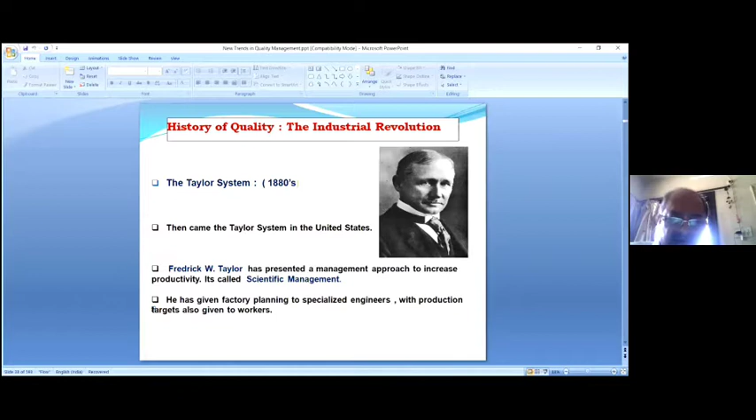Cost of poor quality, or cost of quality concept, was introduced. The factory system was developed. Taylor introduced the principle of scientific management around 1880.

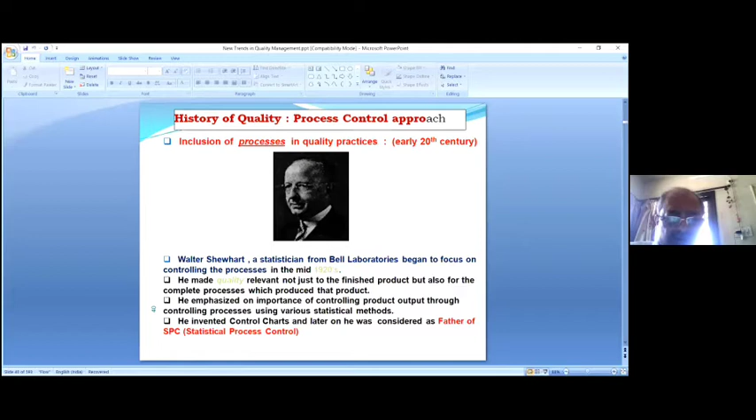Then Shewhart introduced SPC. He is called the father of statistical process control. This is history of quality around World War or something.

Then Deming says that learning is not compulsory, neither is survival. Nobody says that you should learn, it is not compulsory. But if we will not learn, it is difficult for us to survive. That is the philosophy what he preached.

Then Japan was considered the hallmark of quality because they started adopting Six Sigma and SPC in a more effective manner. Ishikawa diagram, we know all these things, the concept of internal customer, fishbone diagram. Morita was the Sony company.

The first World Quality Day was celebrated on November 9, 1989. And these are all theory. We can see various comparisons: inspection, what it involved, SQC, TQM.

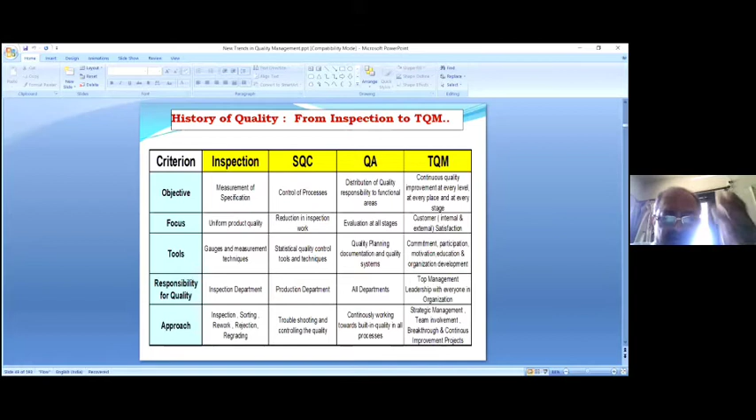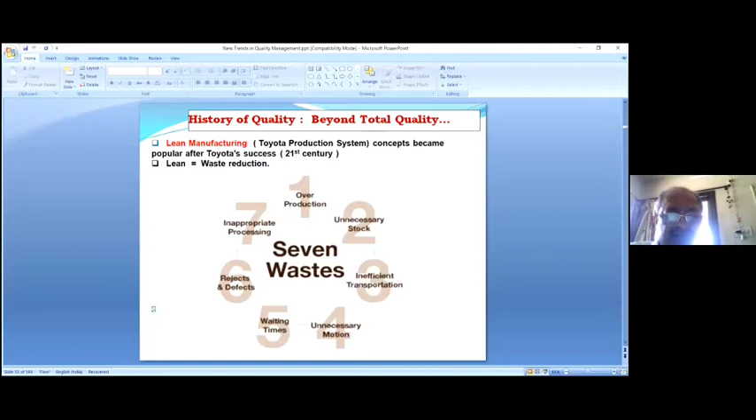Lean manufacturing concept, seven wastes, were introduced and applied by the Taiichi Ohno think tank of Toyota Production System. Shigeo Shingo: SMED, Poka-Yoke, just-in-time, source inspection.

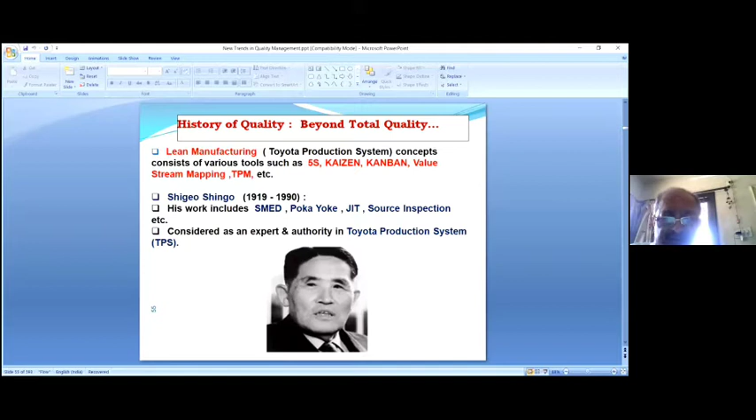Steve Jobs has given a very good definition of quality from today and near future perspective. He died in 2011. That's what I may be wrong, because I do not have time to read all this history, but it is mentioned over here. Somebody from us may be knowing much better about him, but what is mentioned over here.

He said we are supposed to continue to do innovation, pleasantly surprise our customers and competition, and increase the speed of our business process. So indirectly, he was saying about Lean also and Six Sigma.

If we want to increase the speed of our business, we are supposed to identify non-value-added activities, that means the waste of all these things, so that we can deliver the product in minimum time from raw material to the delivery. That indirectly he has said.

Henry Ford: quality means doing it right when no one is looking. This is very simple, this is the definition of quality, from this you can say.

The dictionary. This Japanese quality guru has also given some definition. Quality has to incorporate conformance to specification, fitness for use. You are supposed to delight the customer. What does quality mean? Internal and external customer satisfaction.

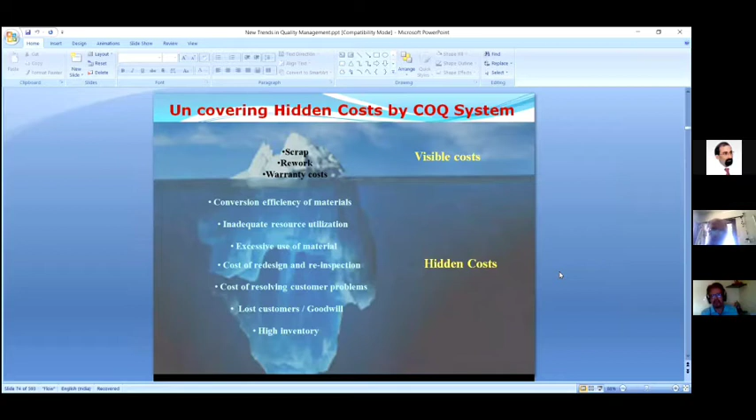For example, lower efficiency of a boiler, say 68%, is a visible waste. But the heat loss which can be and should be recovered to supplement the cost of fuel is a hidden waste. So the industrial engineering department has to continuously work on identifying hidden things. In a machine shop you see scrap lying, people doing reworking, reprocessing, readjustment, but industry has to find out why this is occurring and the reasons for elimination or reduction of all these things.

So the thing which you cannot see is hidden. Loss of customer goodwill is a hidden thing. With this diagram, we can see that road accidents are a visible waste. On Indian roads, every 3.5 minutes an individual loses his or her life.

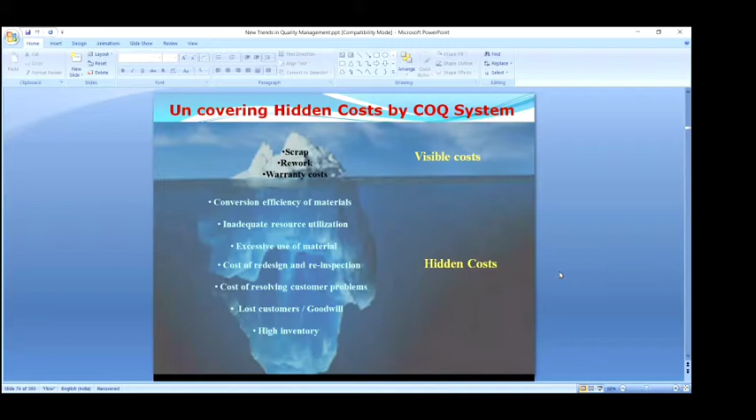Cost of quality consists of three things: prevention cost, appraisal cost, and failure cost. The failure cost consists of internal failure and external failure. So cost of quality, or cost of poor quality, costs the company for the consequences of producing and generating poor quality, because if you produce poor quality and deliver it, it costs the company. In that sense, another name for cost of quality is cost of poor quality.

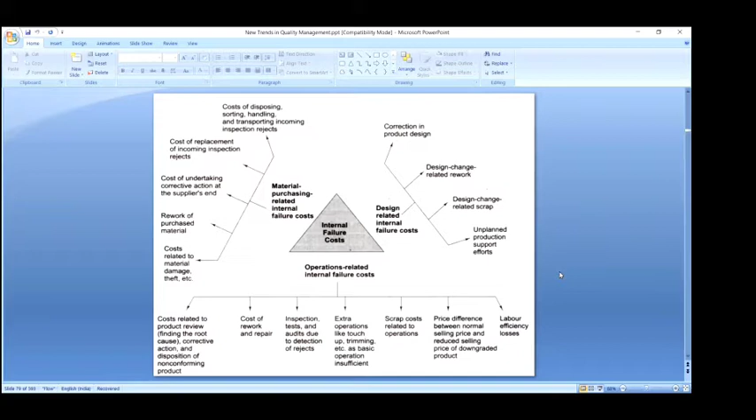Product fails before shipment - that's internal failure. All various kinds of costs are mentioned. Product fails after shipment - that means external failure.

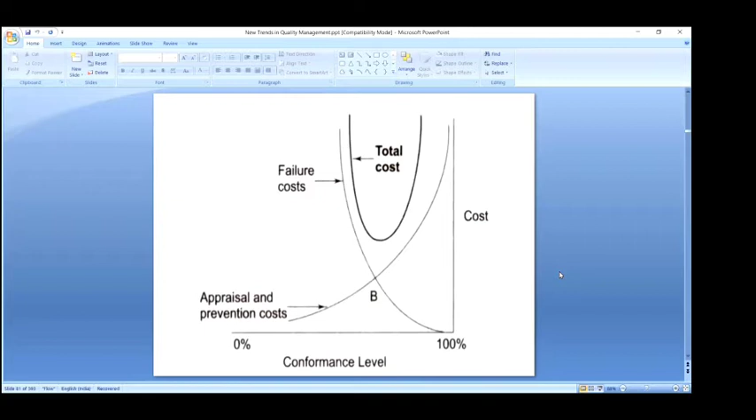So then they thought now we should apply new quality management initiatives - TQM and all these things. If we apply these, prevention cost increases. If we apply 5S, Six Sigma, ISO 9000 certification, ISO 14000, TPM, the cost of prevention and the appraisal cost should increase. Previously it was zero, and because it was zero, the failure costs were high. So when it was observed that the total failure cost is too high, management started awakening and decided now we should implement TQM, otherwise we will not stand anywhere. Because of that thought, the prevention and appraisal cost started increasing. So as the efforts for preventing defects and accidents gradually increase, the failure cost will decrease. That is this diagram.

This is theory - what is the difference between quality control and TQM? So this is theory. Then what is the meaning of TQM? Total means everyone should be involved. This represents inclusive of everything that a company does - all departments, all employees, all machinery are involved. That's what total means, as shown by the diagram.

Customers are involved, suppliers are involved, all departments are involved. Then quality - customers should be provided with better quality products and services that meet or even exceed expectations. Management - the way total quality is conducted in experience, balancing and satisfying needs. Our focus is customer-focused management, with continuous improvement of our processes and products through fact and data-based decisions. We should work with the data.

This diagram is from the same book by Mohanty. I think in a very rare book I have seen the definition of TQM shown by means of a diagram - this begins and ends with the customer. In theory, total quality management is a Japanese management system aimed at continuous improvement of product, people, and processes - continuous improvement in process activities, people, services, and product. The Deming Prize Committee has given a very good practical definition of TQM: a set of activities carried out by the entire organization.

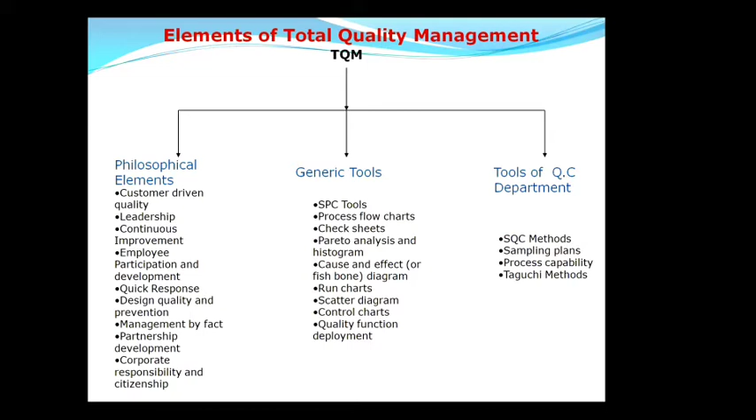Every department must be involved to effectively and efficiently achieve company objectives so as to provide products and services with a level of quality that satisfies customers at appropriate time and price. These are all various elements of TQM, philosophical elements, generic tools of QC department.

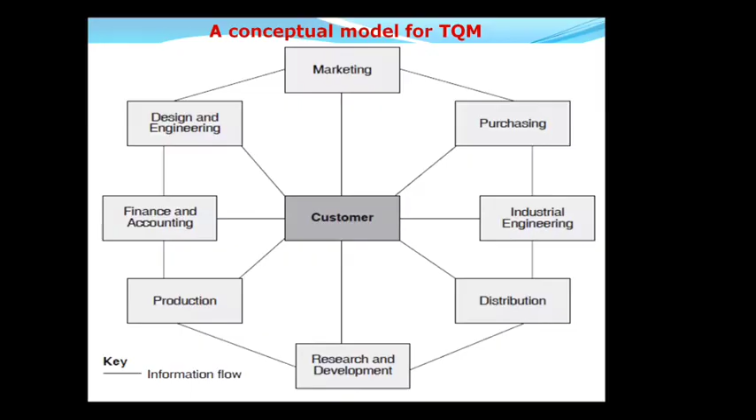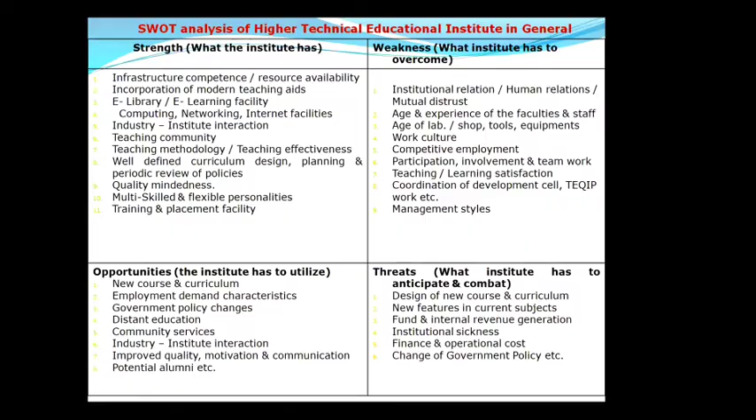These SWOT analysis and TQM building block models are given in the book. From that book, I have prepared the TQM building block model for the technical education system. This is the umbrella definition of TQM, the roadmap for TQM.

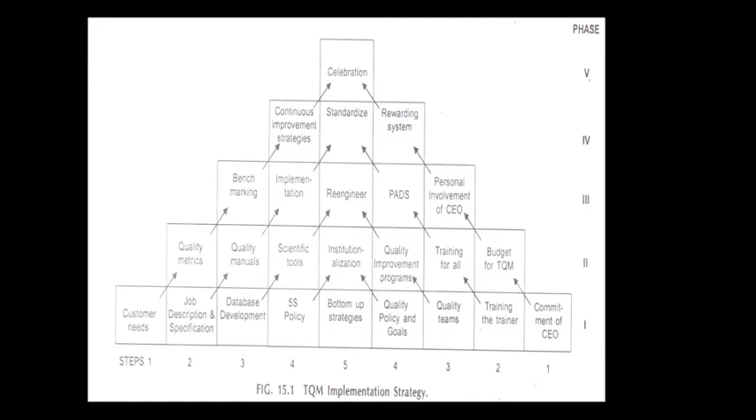The TQM implementation strategy — you can see the 5S policy. When we are supposed to apply this, 5S is applied first, then Six Sigma. Many of us know the reason, because it is for housekeeping and the workplace. These are performance indicators for measuring the results of TQM.

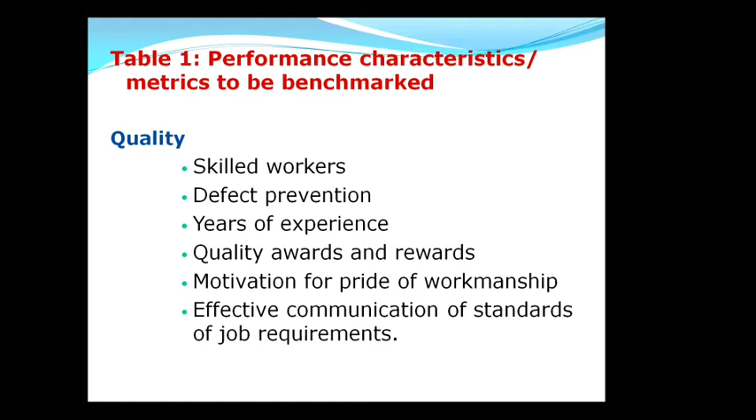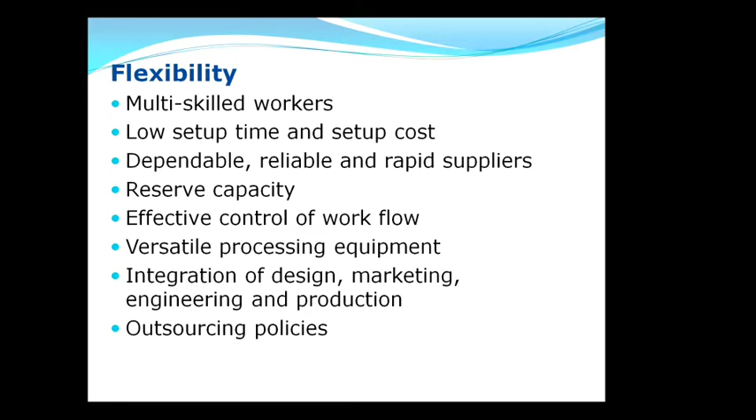Other thing - you can measure performance characteristics or metrics to be benchmarked: quality, skilled worker, defect prevention, etc. How you can measure efficiency, reliability, flexibility, capacity, customer satisfaction, sample of data, all these things.

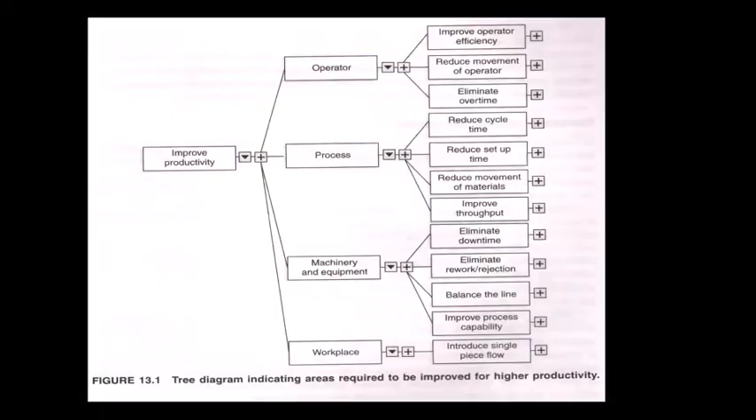I will share some of the slides, I will mail and then share to Shinde Saab. Points of care while implementing TQM - TQM is not a quick and easy solution, right?

Then this is some roadmap. You start from the vision, determination of customer requirement, set the process measure and performance indicators. What we have, I have shown some of the things. Determine process, redesign, and other things.

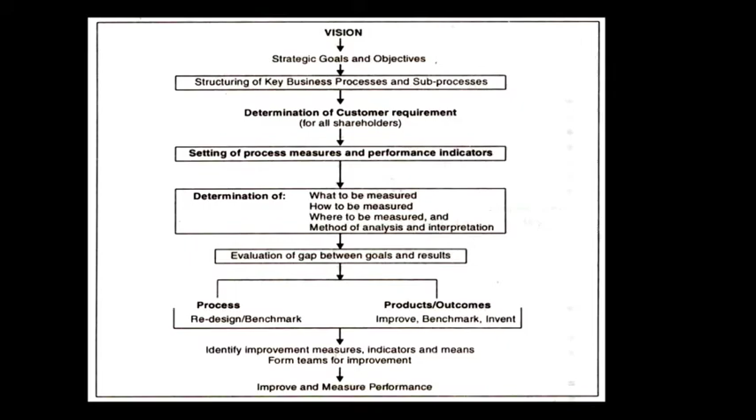This is how the business performance works. All these things I have shared, I have taken from a book, and this diagram, as you can see, which was published - this book was published around 15 years ago, I think a US based book, I don't remember exactly.

Then advantages - obviously these are all we know. It reduces, tries to reduce the scrap, promotes doing it first time every time - these I will share, because if I read this there's no point, anybody can read it. Advantages are mentioned, tangible benefit - you can reduce the quality cost, because if you implement TQM, prevention cost is increased, the appraisal cost is enhanced, but your internal and external failure cost will be lowered down, so that means quality cost is reduced, cost of poor quality is reduced.

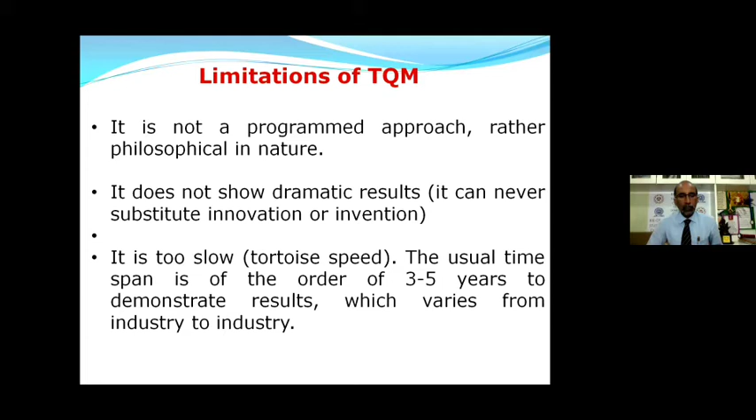So in that sense it is a limitation, it cannot show dramatic results, but obviously it requires time to achieve the result. If today you introduced TQM tools and techniques, you cannot expect results in 4 months, it is not proper, these are some of the limitations mentioned.

Kaizen, 5S, TPM - if I have to cover the full technique, just as an introduction of the basic elements, it would require 2 to 3 hours. Just some names I am reading: Kaizen, 5S - Seiri, Seiso, Seiton, Seiketsu, Shitsuke - these words we are familiar with. Quality function deployment, QFD.

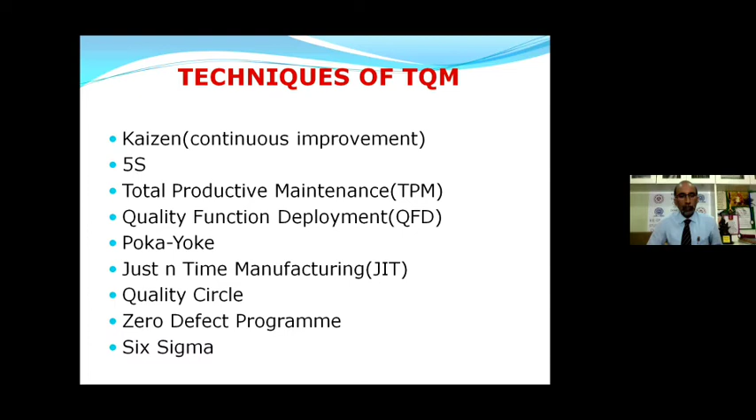Okay, just in time, quality circle, zero defect program, Six Sigma - these are part of TQM, right?

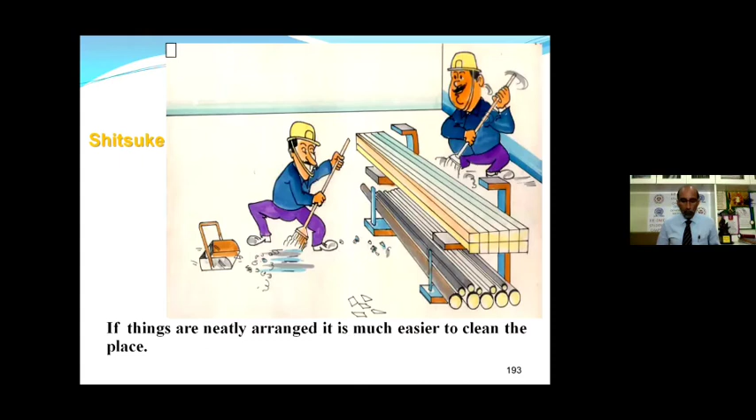Now at the end, if time permits, I will show some of the slides. You can just see these are all the things - if we start in detail, it would require 3 hours. But in a glimpse, you can see 5S running, Kaizen, and what is the philosophy of Kaizen.

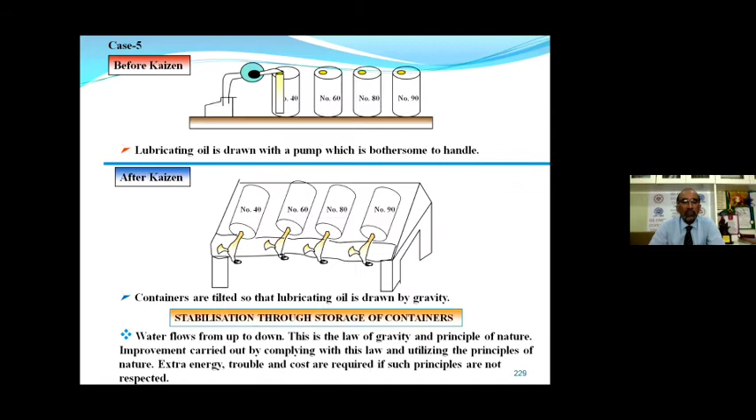So these are all diagrams I have, but it required time, so I think I will end here because this is a simple, very good example which you can see.

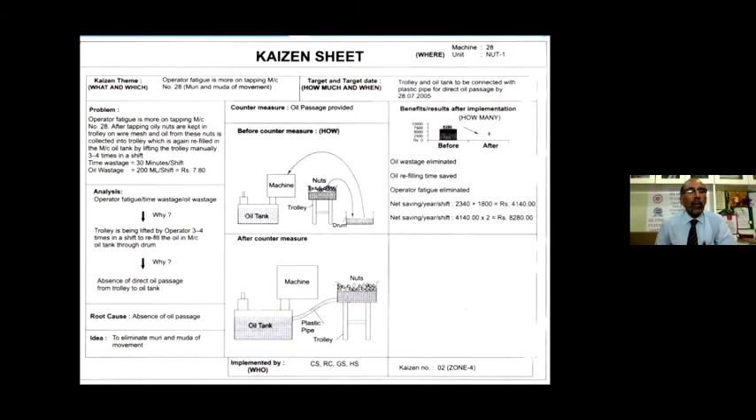I think, sir, I will conclude and then we will switch over to the Kavya session. Professor Desai, this was a very good session on quality management. Quality management is not only required for industrial engineering, mechanical engineering, or production engineering, but it is required in every field of the industrial sector, hardware and software. We can say that quality is not a destination, but a journey. You have presented this very nicely, because as far as my knowledge is concerned, this is your area, and Professor Desai is an ocean of this kind of knowledge. He tried his level best to conclude this session within one hour.